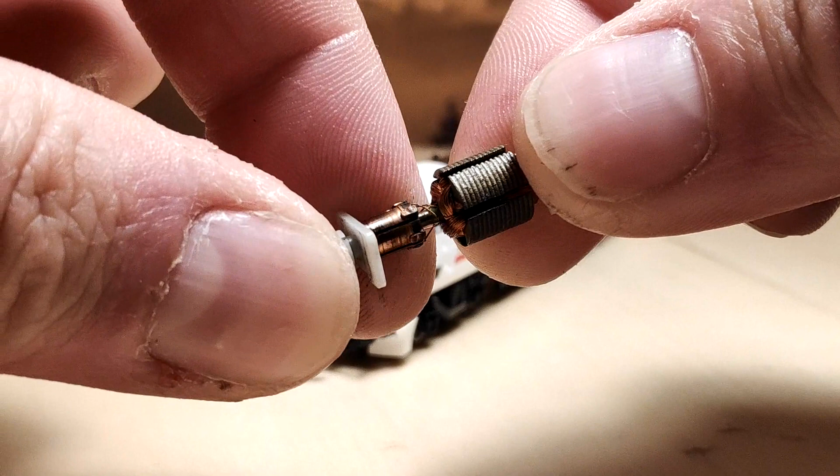What's wrong with this one though is the motor, so I'll show you how to change that out. This is the old motor. I'm filming this prior to or after the main work, and that's what's broken on the old motor. It's torn a few wires and things, so it's knackered, that's why I'm changing it.

Also later on in this video I'll show you how I 3D printed these front spats, or modelled them. It's a relatively simple thing to do, and I know sometimes they can just break, so that's why I've modelled them and printed some. Stay tuned, let's get on with the video.

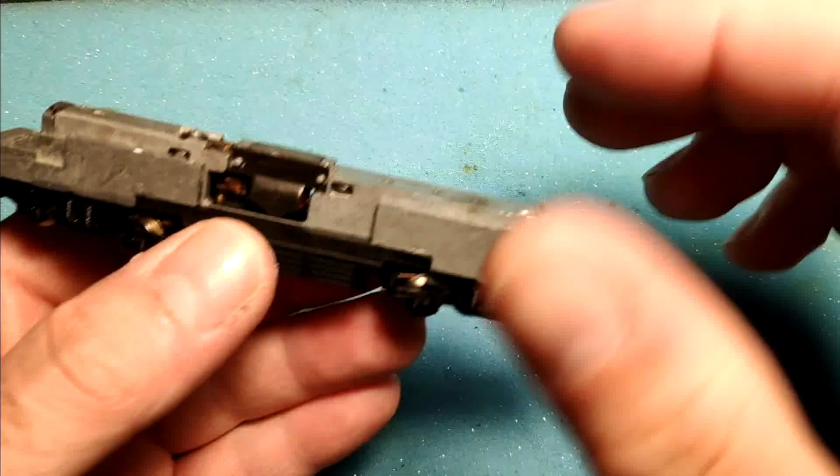First things first, you want to get the shell off your loco to get access to the motor. On most shells you just lift up either side of the body, lifting it away, and it comes off just like that. This is mainly for the Poole type chassis, as this is.

Now I'm interested in the motor, so I need to get that out, and the easiest, or only, way is to take off both ends. I've got a flat-headed countersunk screw, and that lifts off with the end cap there, and the bogies come out. I'm checking that the gears move freely at this point, to make sure they don't need any attention later, because now is a good time to find out any other issues.

We'll carry on with the other end of the chassis, and might as well check this bogie as well, make sure it's alright. Yep, spins freely, good. So all the bits are orientated in relation to the chassis I'm holding.

Now the next thing to take off will be the motor side plates and magnet. I use a pen here and mark a line from the front to the side, so that everything can only be put back on one way. Sometimes if you put a magnet on backwards, it can stop your motor from running.

So we take those bits off, the magnet just lifts out, some are glued in. If the magnet wants to stay there, just leave it, just take it out so it's not in my way. But generally speaking, most of those bits should lift out.

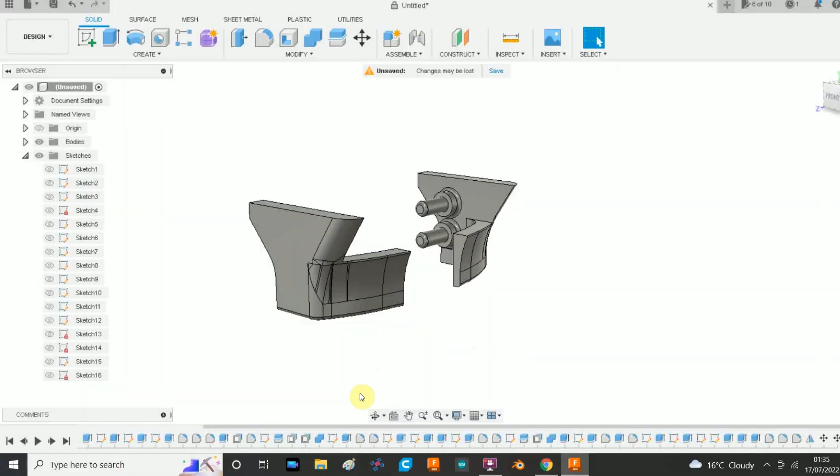Okay, so this is what I basically modelled for the spats on the front of the 225. I'm using a program called Fusion 360. I made one and I basically just mirrored it, and that's how you come up with two symmetrically opposed to each other, which is great.

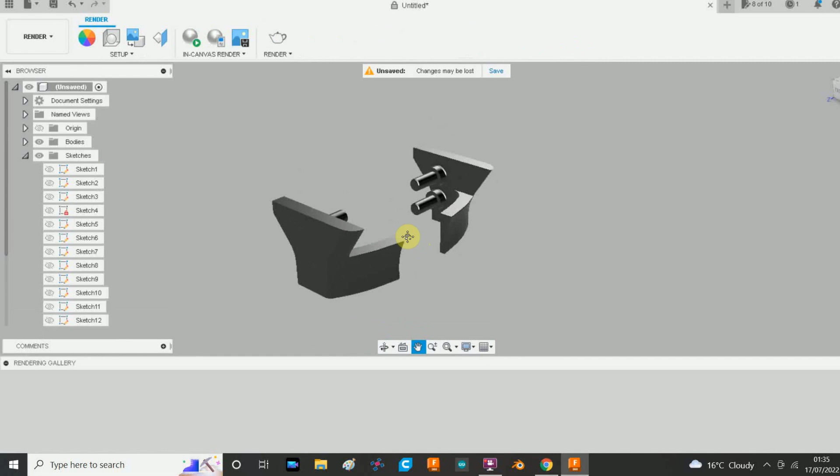And I just wanted to show you this bit really, because in previous videos I showed you how I basically do the modelling. So just make a block and basically carve it away until you get the shape you want. But in this bit here, I basically render it.

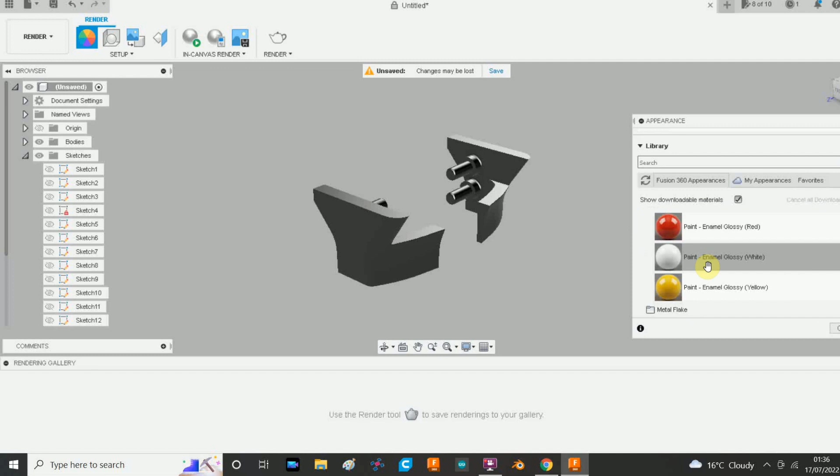So I'm just trying to select white, like paint glossy white, something like that. And I didn't realise Fusion did this until quite recently actually. And it's really quite a cool thing to do, to see what your model would look like in the real world with a bit of light on it and stuff.

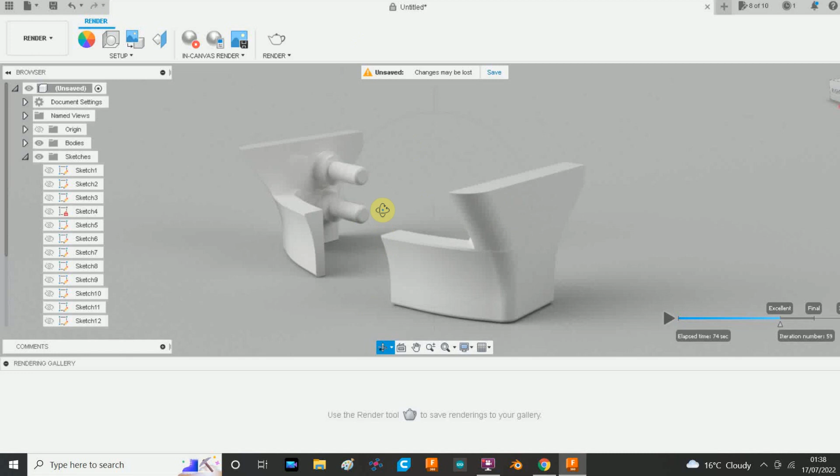So we'll just fast forward here a second. And this is it rendered. So I was quite happy with how this turned out, and naturally I guess the next thing to do was to print it. Every time you move the mouse on the render, it basically resets and starts to load it up again. But hopefully you can get an idea there of what it looks like, and hopefully what it will look like when it's printed.

So you don't have to do this. I just thought, oh, that looks pretty cool. You know, because it's quite late at night and I couldn't actually go and use my printer. So I was just like, oh, I'll have a little look at it.

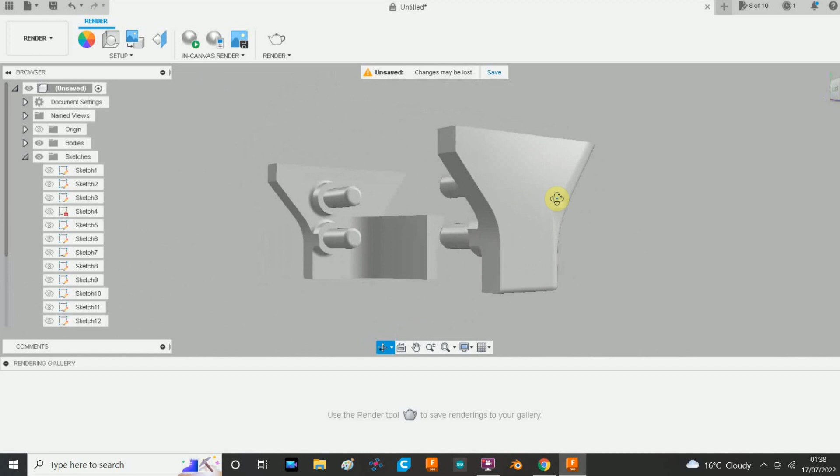So yeah, next thing, really, I'm not going to show you this, but I go and print it the next day and give it a quick airbrush with white paint. And the next bit I'll show you will be them ready to go on the Loco, pretty much.

So here we are, the Loco and newly printed spat. They came out great. I printed them with white resin, but when you cure them, they sort of tan, they go golden brown, like you're cooking them, which you kind of are. So I airbrushed them white, and more or less, it's a direct fit. It just goes in the holes, and job's a good one.

So it needs pushing in a little bit more, and I need to put one on the other side. But yeah, that's it. Work a treat.